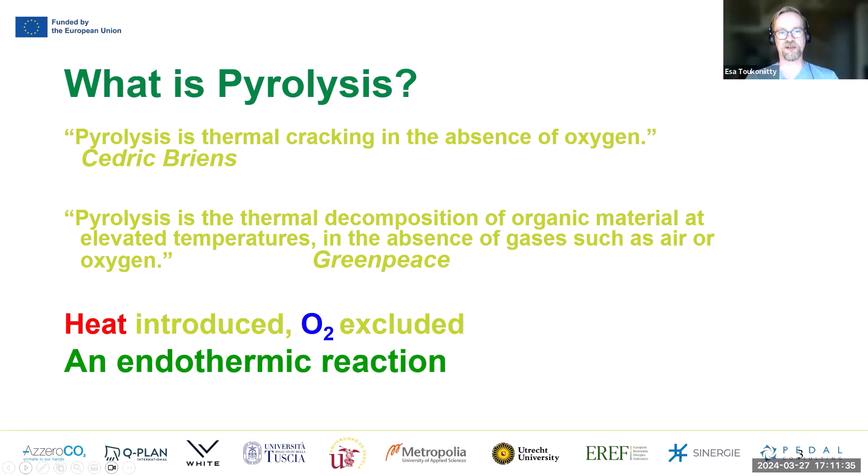We'll start with a short introduction of pyrolysis and liquefaction, and here are some definitions of pyrolysis. It's thermal cracking in the absence of oxygen. Pyrolysis is thermal decomposition of organic material at elevated temperatures in the absence of gases such as air or oxygen.

So basically the biomass is treated at elevated temperature, and it breaks down because of the temperature, and biopolymers break into smaller fractions and more chemicals.

Here is the same illustrated in terms of the biomass itself. So that will be heated to quite high temperatures. We'll take a look at some conditions and residence times and so on during today's class.

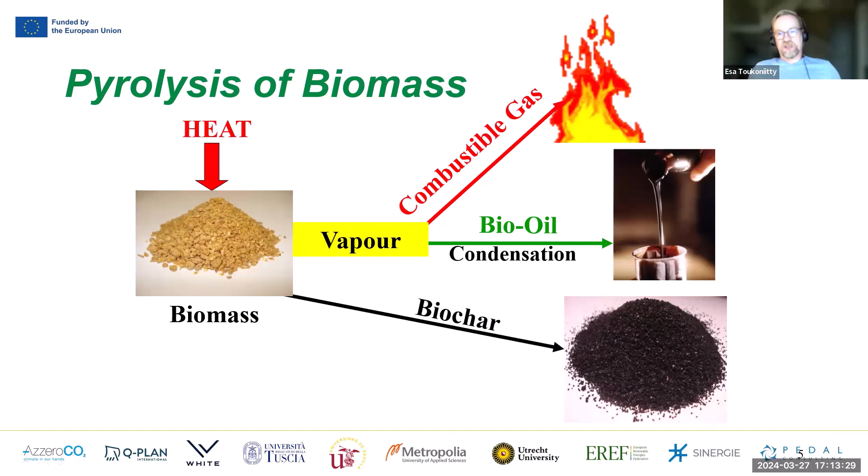But basically only biomass is fed into the reactor. It's heated rapidly and it decomposes into vapor, and also it forms biochar, which is a solid component. And the vapor at high temperature contains a so-called condensable bio-oil part and some light gases which can be combusted.

Thinking about cellulose, the one main ingredient in biomass, when heated it will break down into these different types of bio-oil components. You'll obtain also water, and here you'll see combustible gases like methane, carbon monoxide, and also solid biochar will form as products.

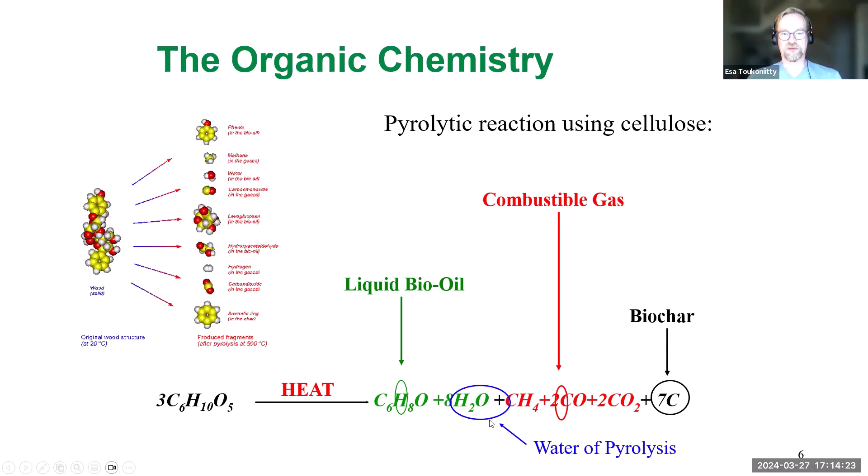Pyrolysis forms also water, and that was the last on that slide.

Advantages of biomass pyrolysis, some very general things: this is one possibility to obtain carbon neutrality, and you can utilize waste biomass, which is preferred over some otherwise useful woody biomass. It can be self-sustaining energy-wise, so the light gases and the biochar can be burnt for energy and used for the pyrolysis process heat.

These pyrolysis bio-oils have increased bulk and energy density, and in principle these can be used to manufacture or upgrade into valuable chemicals such as fuels.

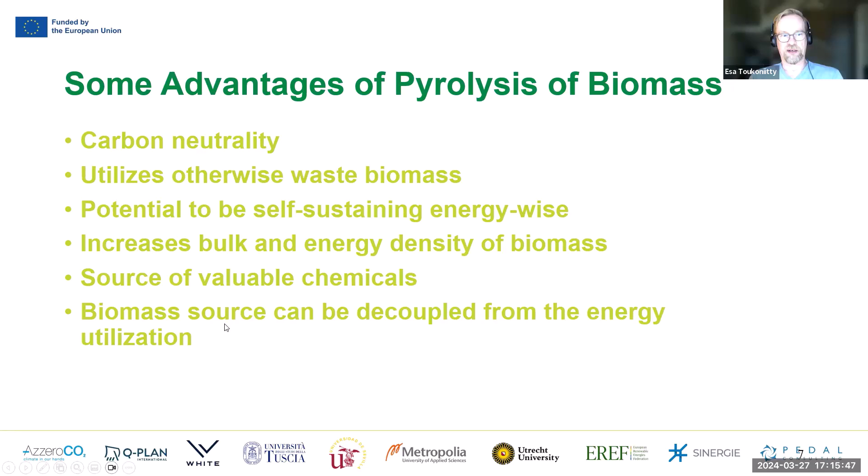Fast pyrolysis of biomass has basically three main parameters that can be varied. One is the temperature. The second is how fast the biomass will be heated, and how long these formed vapors will stay in the reactor.

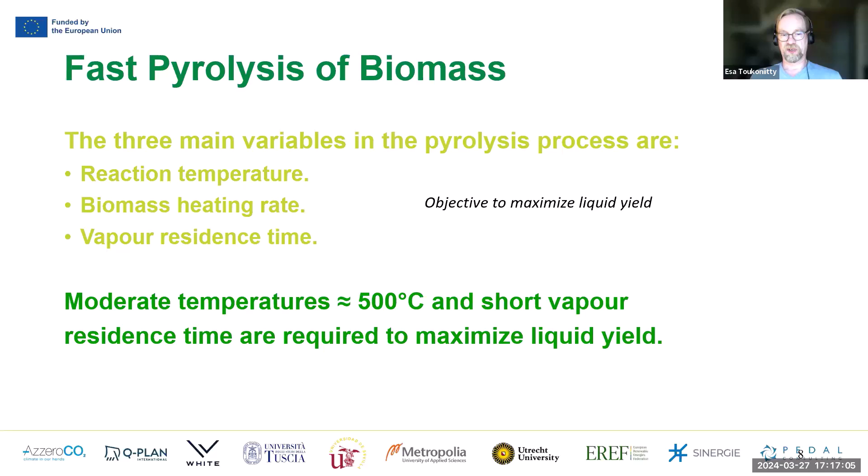With the biofuel context, the objective is to maximize the liquid product fraction. This can be done by applying moderate temperatures - in pyrolysis, moderate temperature can be somewhere around 500 degrees Celsius. Short residence times for vapor also are required, and I have a few slides about that with respect to the product yields.

Here you see different types of treatments: fast, slow, and gasification. Gasification we dealt with last week. Fast pyrolysis has a residence time much shorter in the reactor, and this is the very rough product yield - here you'll see liquid, char (biochar), and the gaseous components.

In gasification, the main product is gas, typically the synthesis gas that we discussed last time. On the other side, there is fast pyrolysis with moderate temperatures, where the main product is liquid components, and gas and solid ones are quite small.

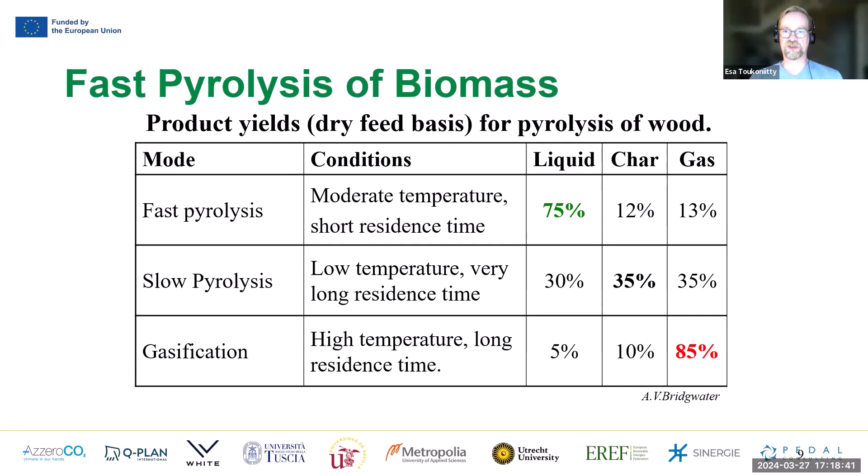Then slow pyrolysis is mainly used for production of biochar, and that's formed not as the only product, but in any case it's one of the largest products obtained in a slow pyrolysis process.

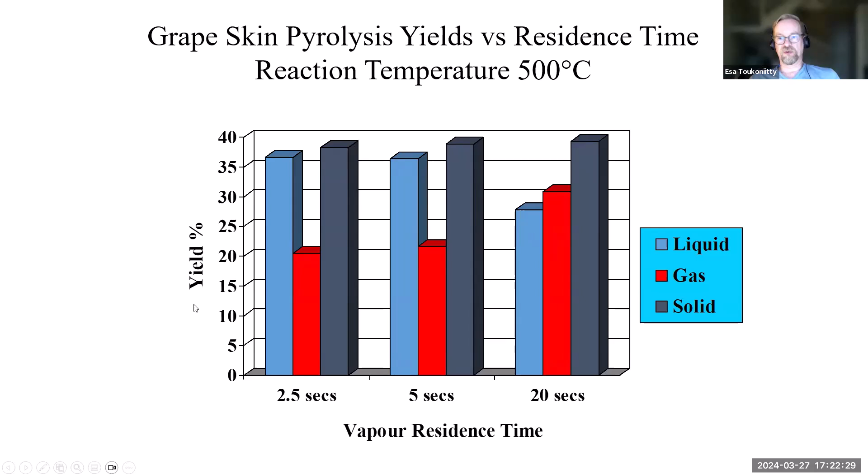At low temperature, reactions are under so-called kinetic control, and the major products are those that form from fastest reactions. But at higher temperature, the reaction is under thermodynamic control, meaning the product is the most thermodynamically stable. So if one wants to understand this another way: at higher temperature, reaction rates are so high that all reach thermodynamic equilibrium, and the product mixture is determined by thermodynamic control. But at low temperature, reaction rates are slower, and the product distribution doesn't reach the thermodynamic equilibrium composition, so it's called being under kinetic control.

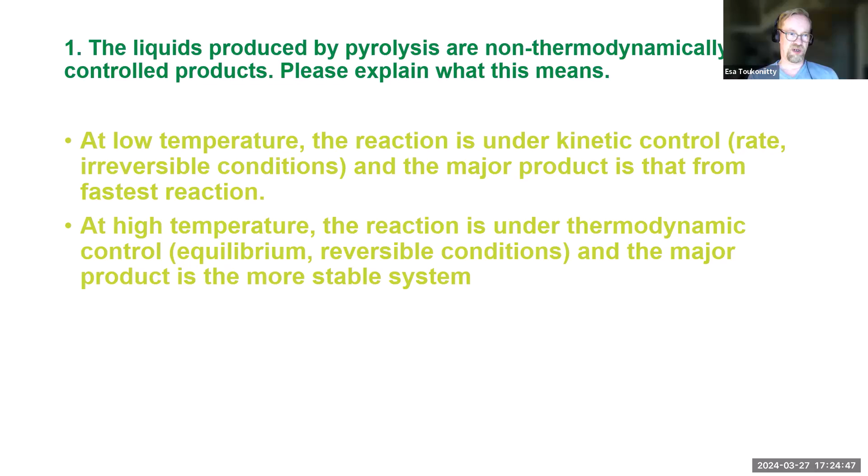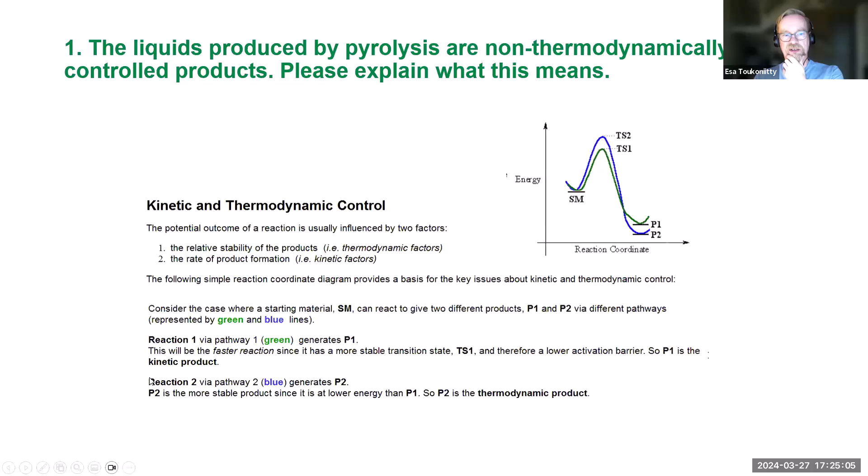Here's another explanation of what it means, but this is more on the physical chemistry side, so I will not go into details. It's the same thing described in another way. Equilibrium constants can be calculated for reactions based on theory and thermodynamic data, but often these rate constants, which are related to reaction rate, cannot be calculated, but those are based on experimental evidence.

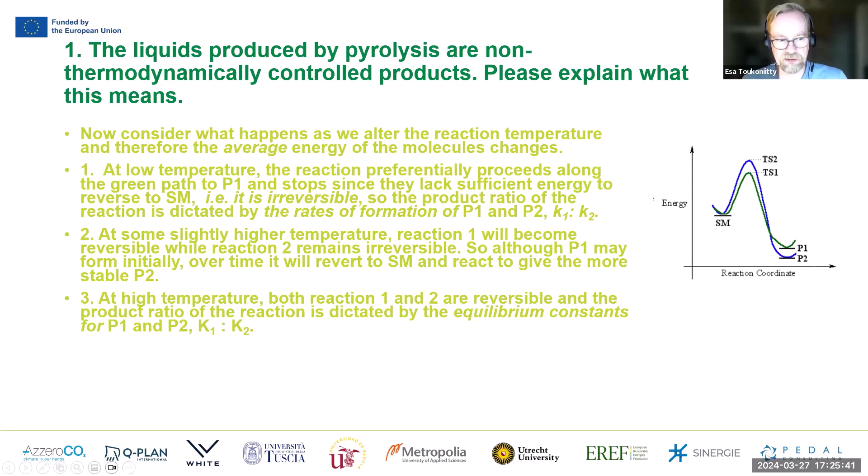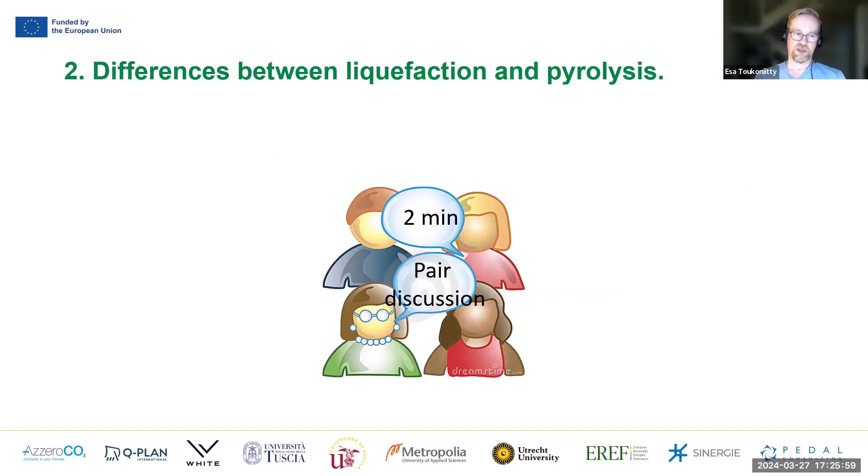Then the course book describes two main bio-oil production methods, one being liquefaction and the other being pyrolysis. So what's the difference in those?

Pyrolysis oils are water soluble and have high oxygen content, higher than liquefaction oils. On the opposite side, liquefaction is another type of process for treating biomass, and it produces water insoluble bio-oils. So there is a clear difference.

The process conditions vary in that liquefaction happens at lower temperatures and higher pressures, whereas pyrolysis is the vice versa - pressure is low and temperatures are higher. We have more material on both of these coming shortly. Pyrolysis has lower capital cost because of the lower pressure requirements - high pressure equipment is much more expensive than low pressure equipment. So that is the main factor behind this difference.

Typical characteristics and properties of pyrolysis versus liquefaction - the course book contains most of these tables and slide materials that I show here. You can compare typical properties of pyrolysis oil, liquefaction oil, and heavy fuel oil, which is a fossil-based product.

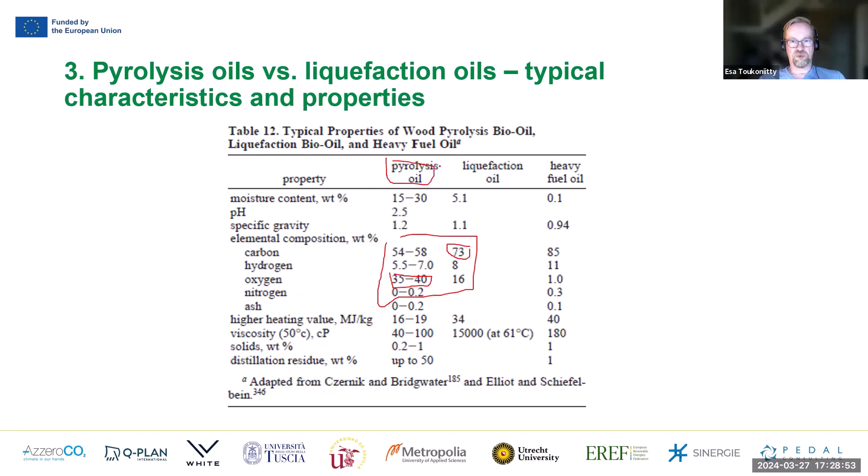The elemental compositions of pyrolysis oil and liquefaction oil vary to some extent. Liquefaction oil has clearly higher amount of carbon, which is good - that's the element we want in the fuel. On the other hand, pyrolysis oil has a lot of oxygen, which is not desired for fuel. That partly comes from different water-soluble components, making the pyrolysis oil water-soluble, whereas the liquefaction oil is insoluble to water.

Other parameters vary too - pyrolysis oil has quite a lot of moisture or water, whereas liquefaction oil has much lower amounts.

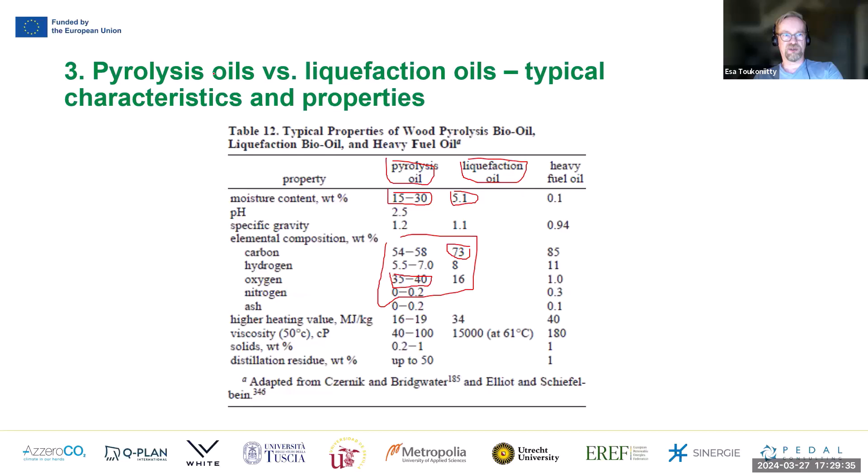Advantages that can be found for bio-oils: keep in mind that bio-oils can be made with pyrolysis or liquefaction. If you want to specify the method, you can talk about pyrolysis oil and liquefaction oil, but generally these are both bio-oils.

The benefit here is that bio-oil production requires only a single reactor, and a large fraction of the biomass energy can be converted or contained in the formed liquid product. Also, very different types of biomass feedstocks can be used, and the reactor is not that picky or sensitive regarding that.

There were some ideas for how the process would be organized. Since the bio-oil reactor setup is fairly simple, I have heard about ideas that there would be smaller reactors closer to the site where the biomass is formed, because that can be treated on site, and then the energy dense bio-oil could be transported into bio-oil refineries where fancier upgrading steps could be done. This enables cheaper transportation, since the bio-oil is already condensed.

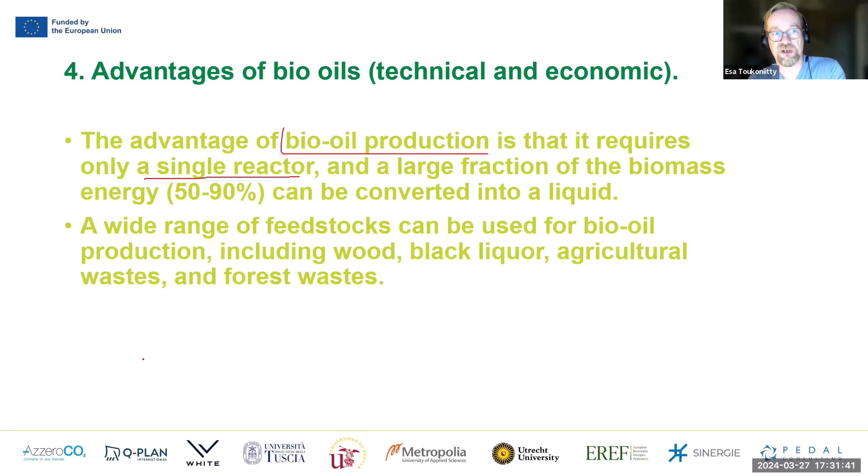Disadvantages are also in bio-oils. If we think about bio-oil as a fuel, there are lots of problematic features: poor volatility, high viscosity, coking tendency, it's corrosive, and also cold flow problems. This comes partly from the viscosity, and it's too viscous at low temperatures.

Also, although this textbook is 20 years old, I think there aren't yet really any standards for the bio-oils, and that's what we discussed in the first part of the course, that standards are very important to guarantee quality.

that the material or the fuel is of stable quality, or it fulfills the standard requirements. Main concerns with using bio-oils in diesel engines are the difficulty of ignition, corrosion, and coking, and due to these disadvantages, it's very often that bio-oils must be upgraded.

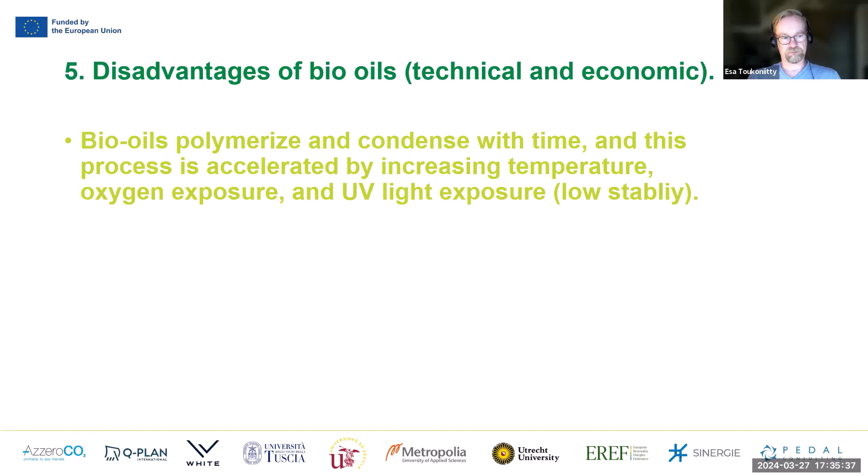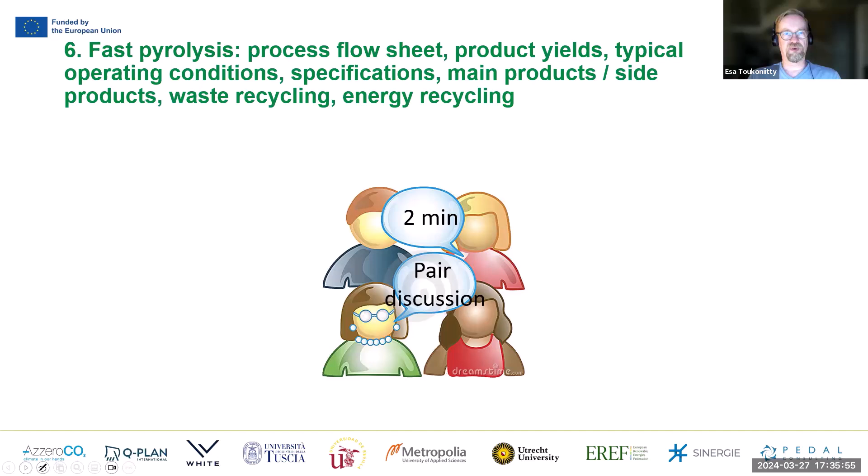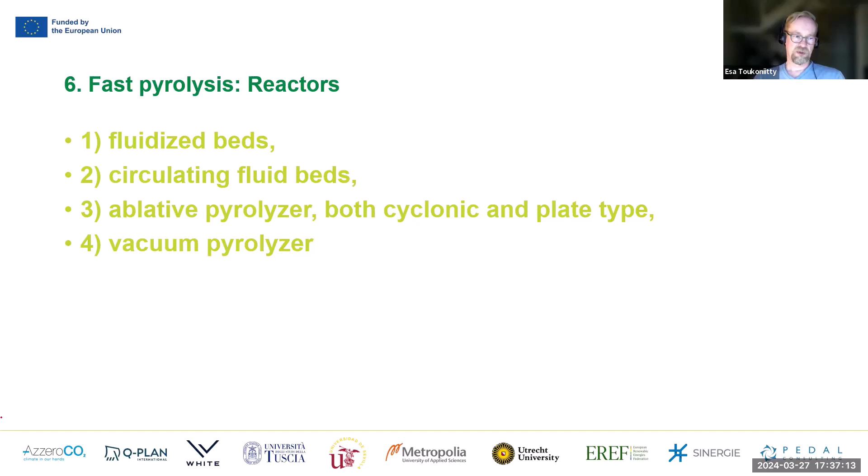There are different types of reactors for pyrolysis: fluidized bed, circulating fluidized bed, ablative pyrolyzer, and vacuum pyrolyzer. These all have been explained to some extent in the course textbook, and I have a few slides about this.

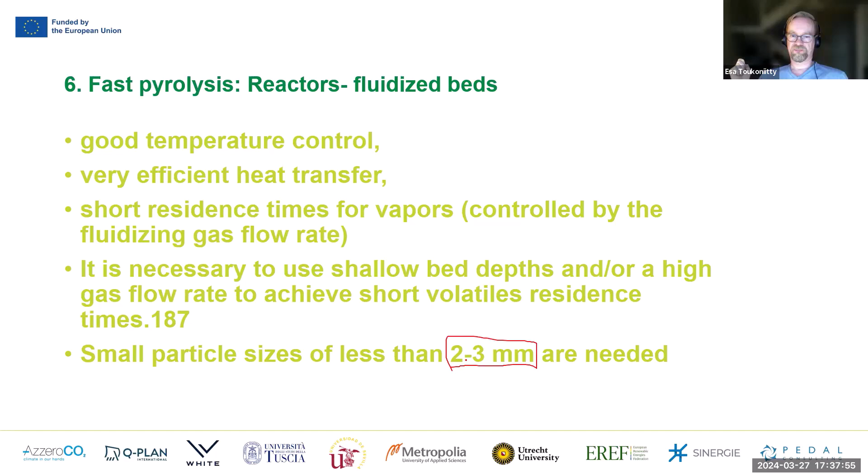Here are some advantages and disadvantages, so I will not go into these in detail because you can read those yourself. Only thing I can note is that for this type of reactor, the biomass has to be ground to fairly small powders or small particle size, from 2 to 3 millimeters diameter.

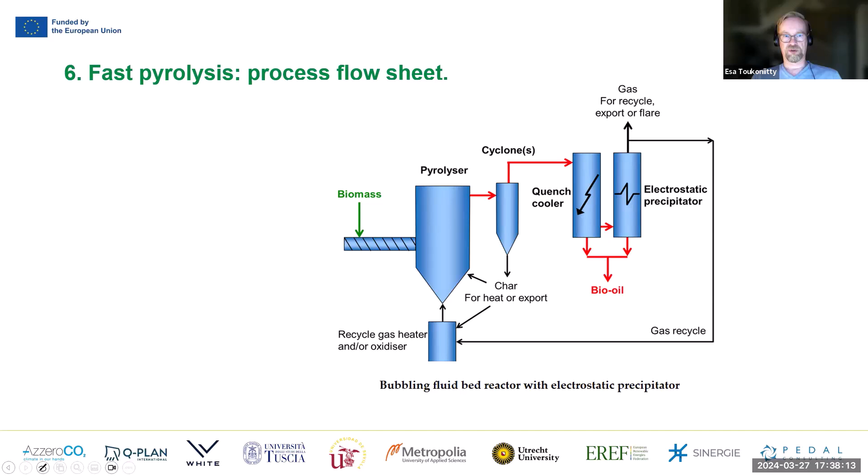I think this is more or less the same reactor setup we already saw. In fluidized beds, the heating of the biomass happens through conduction of the reactor walls and also with the help of the fluidizing gas that is pushed from the bottom all the way through the reactor.

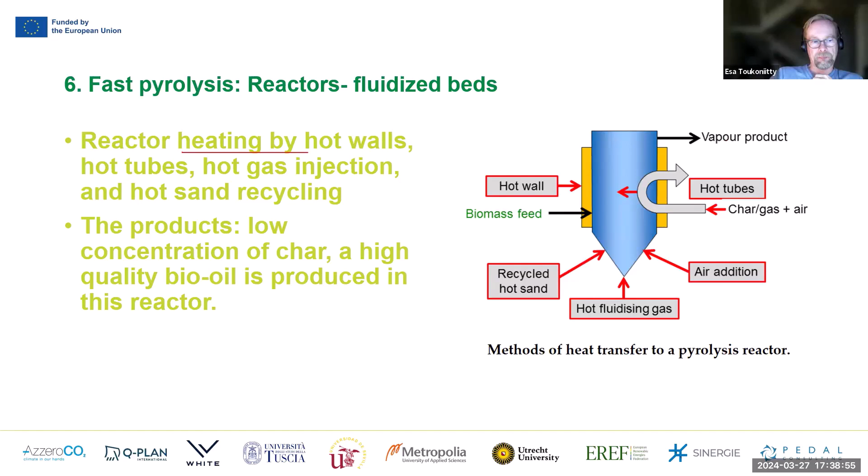Circulating fluid bed is slightly different, so the operating principle there is slightly different. The char residence time is almost the same as the vapor and gas residence time. The hydrodynamics of these circulating fluid beds are rather complex, but they can produce high throughputs of processed biomass.

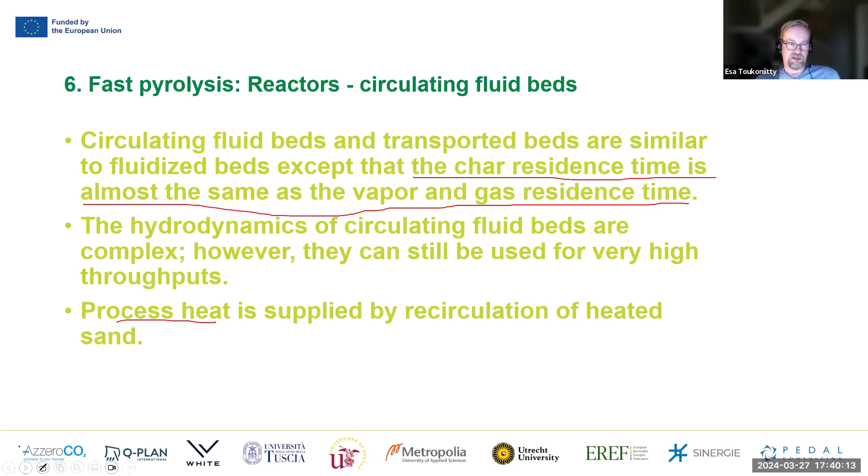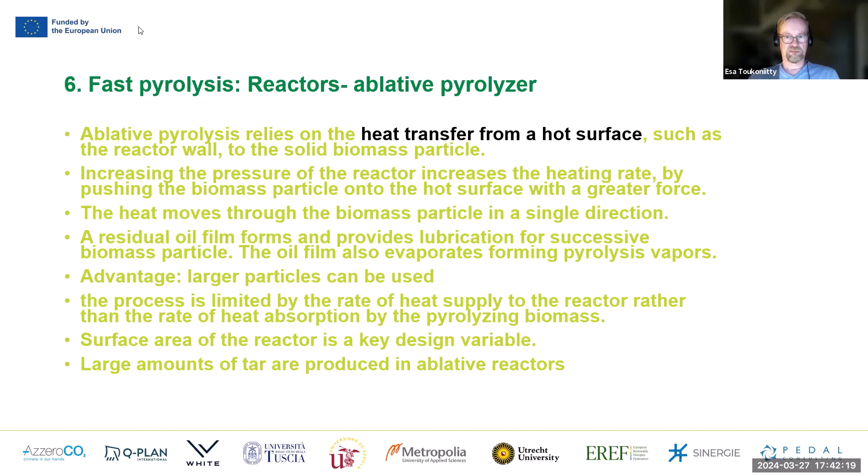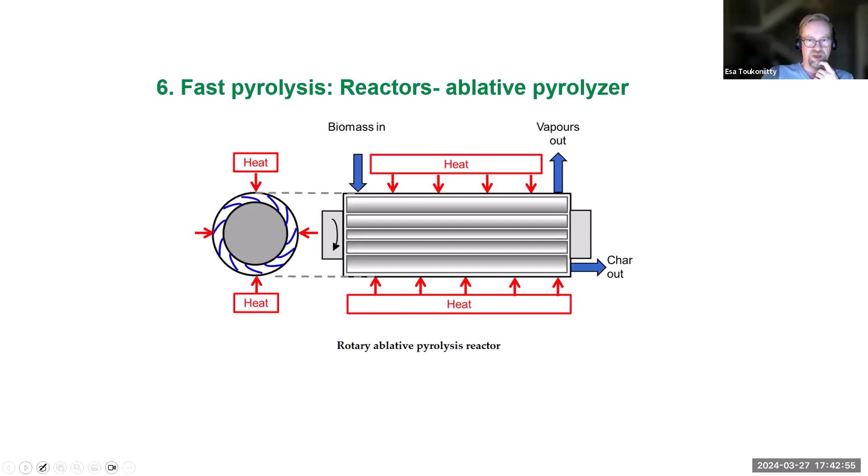This picture maybe gives a better view. These blue things that squeeze the biomass against the hot wall are called blades, and this is an enlarged image. What happens is that the blade presses the wood chips against the hot metal wall, and the heat from that wall causes the pyrolysis reactions to take place, forming the products.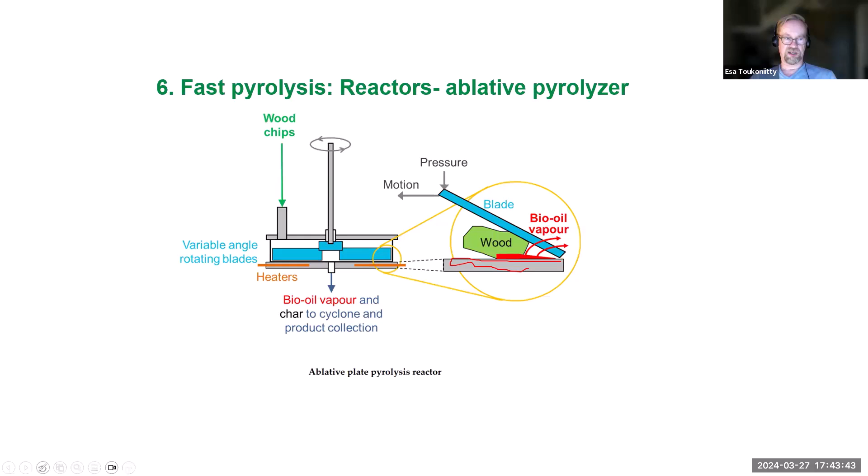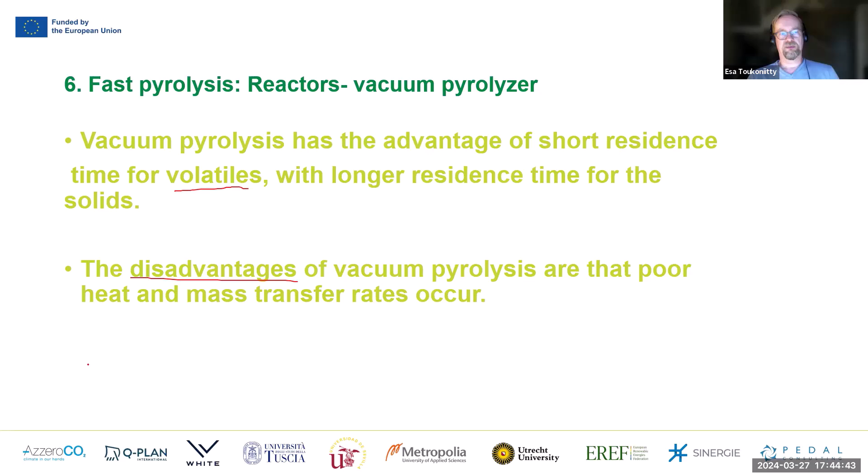Vacuum pyrolyzer was that fourth reactor type, and it has advantages like very short residence time for the volatile components and longer residence time for the solids. So it allows more balancing between the solid and the gaseous liquid components, maybe minimizing the amount of solids and maximizing gases and liquids. If there is a vacuum inside the reactor, the disadvantage is that in vacuum the heat transfer is rather poor, so that can be challenging.

Here's a collection of these different types of reactors. If you are interested, you can take a look and study these further. Here are different categories like technologies that are in commercial use and some which are only at laboratory scale.

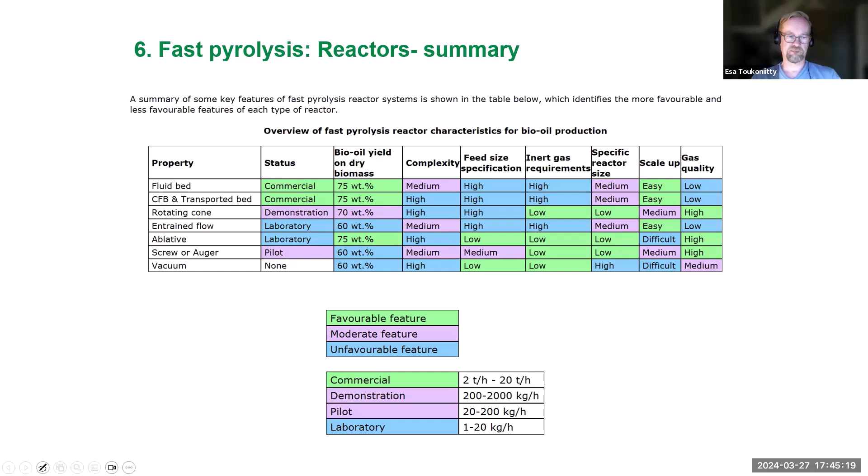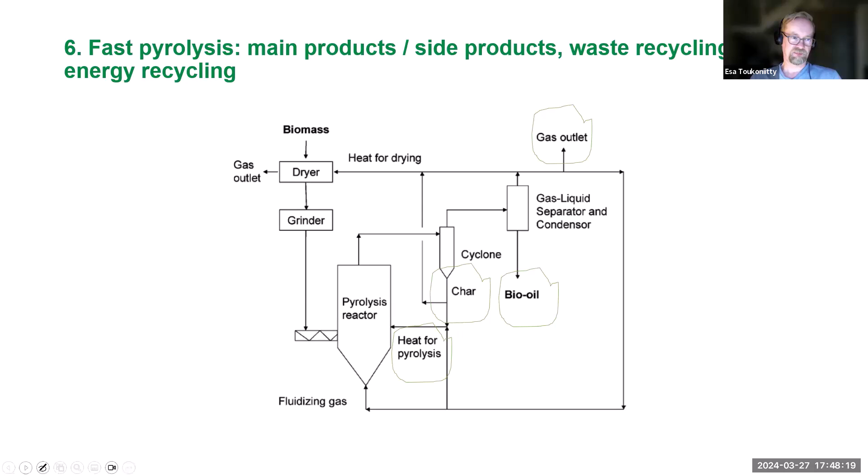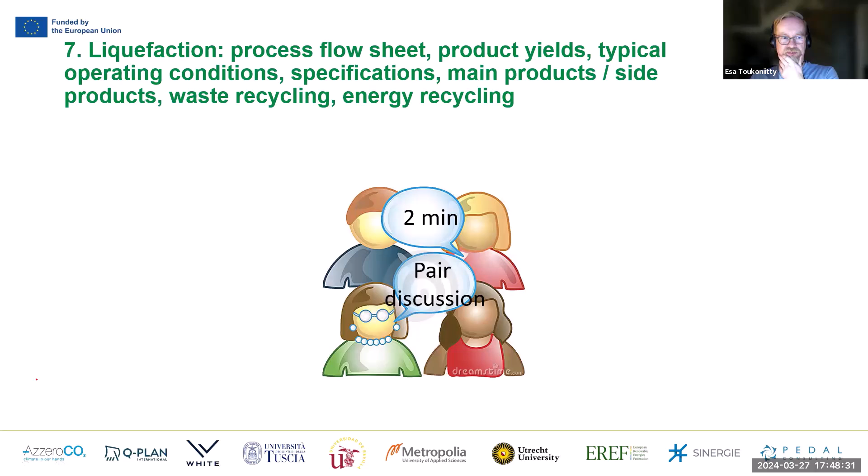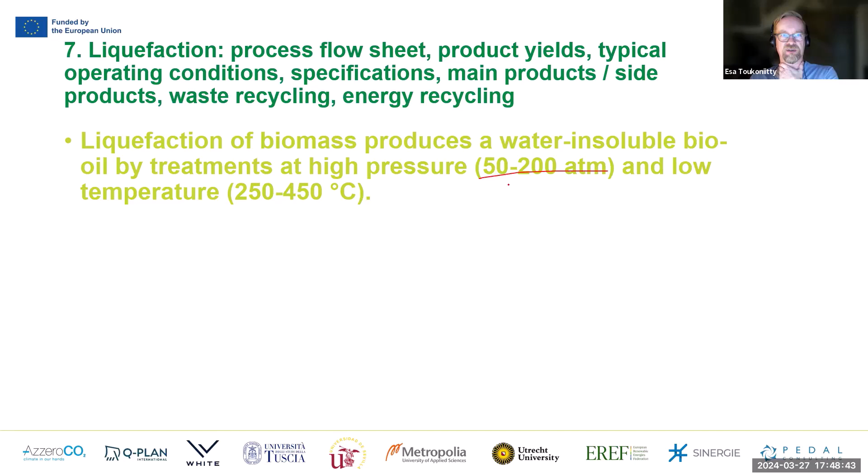But this we already went through some time ago. Liquefaction process - so previously those reactors were pyrolysis, this is about liquefaction, and here high pressure is the key to the liquefaction. So what liquefaction is: in the pyrolysis there were basically only the biomass and then the heat that is applied.

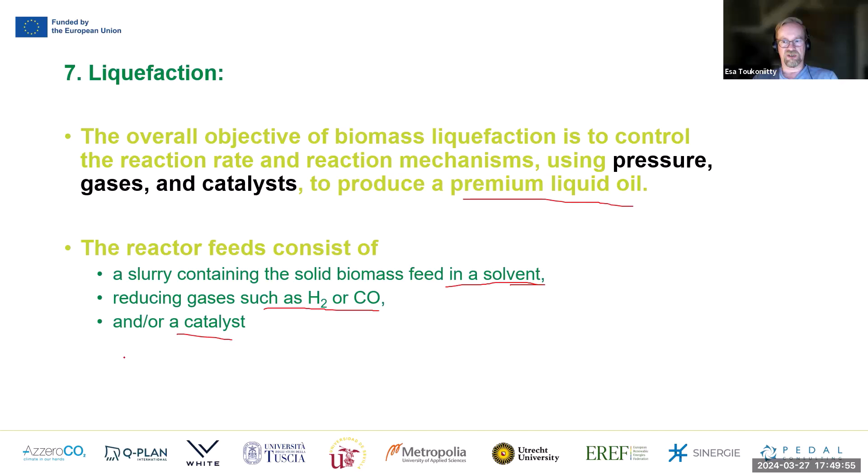In liquefaction, there is the high pressure gases and catalyst that are employed to make a higher quality liquid product, and there can also be used a solvent and reducing gases like hydrogen, carbon monoxide, and the catalyst. So this is basically a reactor where you have the biomass, then you mix it with some solvent, introduce hydrogen or reducing agents which remove, for example, oxygen impurities, typically with the help of a catalyst. So this is kind of a more demanding process.

If you utilize the solvent, aqueous solvent, so water, you can talk about hydrothermal processing. If you don't have any solvent, you can talk about hydropyrolysis. And if you have a reactive solvent, that could be some base or acid, then talk about solvolysis process.

Whenever you applied molecular hydrogen, you need a certain catalyst, because molecular hydrogen as such is very inert. Nothing happens, or it's not reactive, if we exclude combustion, so it requires the catalyst for it to do something good. And solvolysis utilizes solvents like creosote oil, ethylene glycol, or certain alcohols and phenols as solvents - some examples of those.

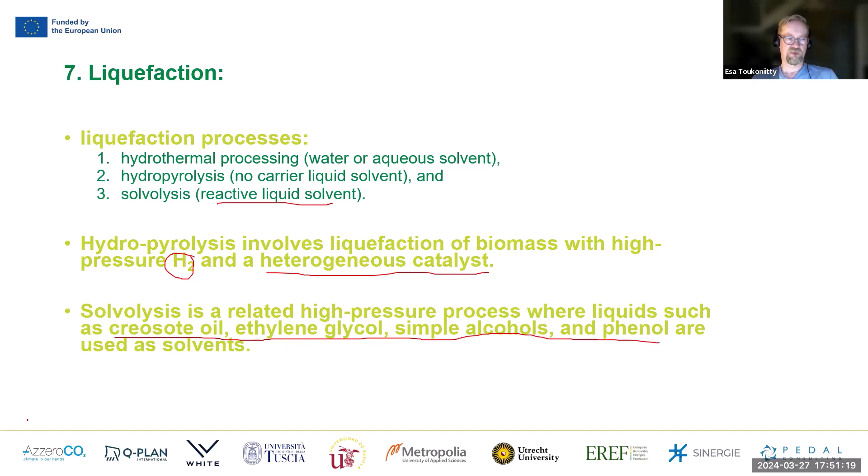So the hydrothermal upgrading or hydrothermal processing is treatment with water and the bio oil itself. That's one example where it can be applied. Here's a process flow scheme of this type of hydrothermal upgrading process.

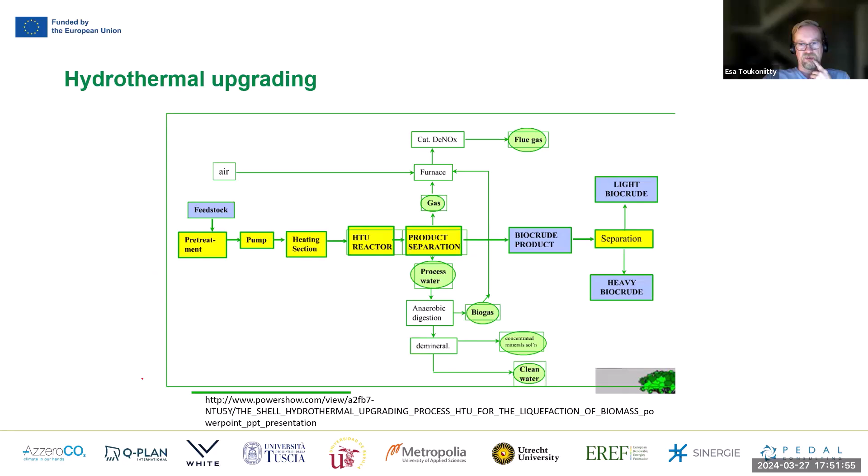The catalysts that are used in liquefaction of biomass are alkaline, typically different types of metals, or then these supported nickel and ruthenium heterogeneous catalysts, which enable hydrogenation reactions. These alkaline catalytic materials break the biomass into different chemicals, the same with this another type of metallic catalysts.

And regarding the solvents, of course water is the most attractive due to its low cost. Another thing is that biomass has always some amount of moisture, so if you use water as solvent, you don't need to dry the biomass before the liquefaction process. So that makes sense to use water.

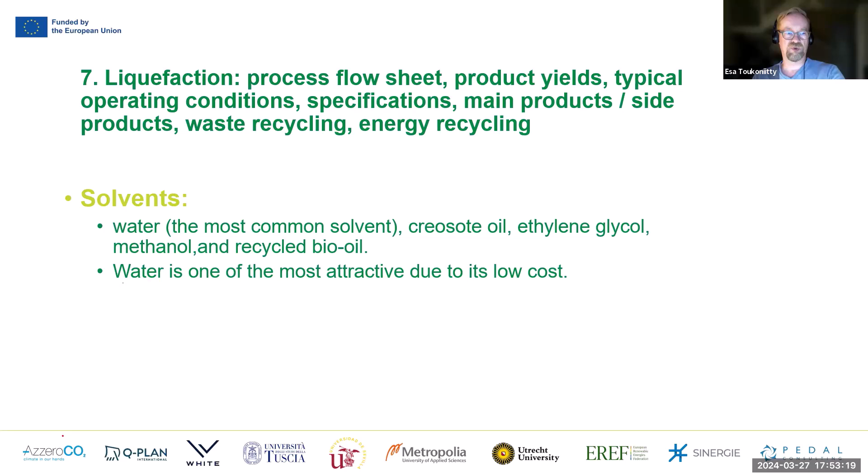A few words about the different reactions that take place while processing or producing these bio oils. There are a lot of reactions taking place because there are hundreds of different molecules or products which can react, which can break into different molecules, and the formed molecules can react with each other.

This is just a list of some examples: hydrolysis, dehydration, isomerization, dehydrogenation, aromatization, retrocondensation, and coking.

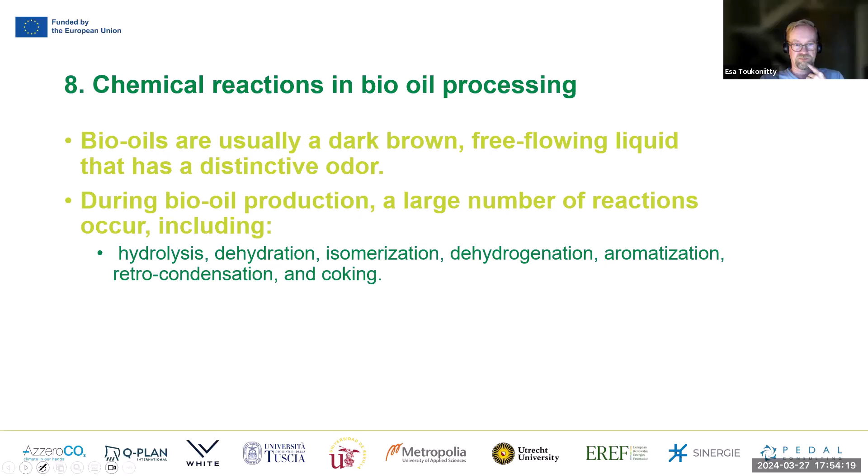What these reactions form is a very broad range of different products: acids, esters, alcohols, ketones, aldehydes, oxygenates, sugars, furans, phenols, and so on. A really complicated mixture of these organic molecules—there can be tens of different acids or esters and so on. So quite a complicated mixture.

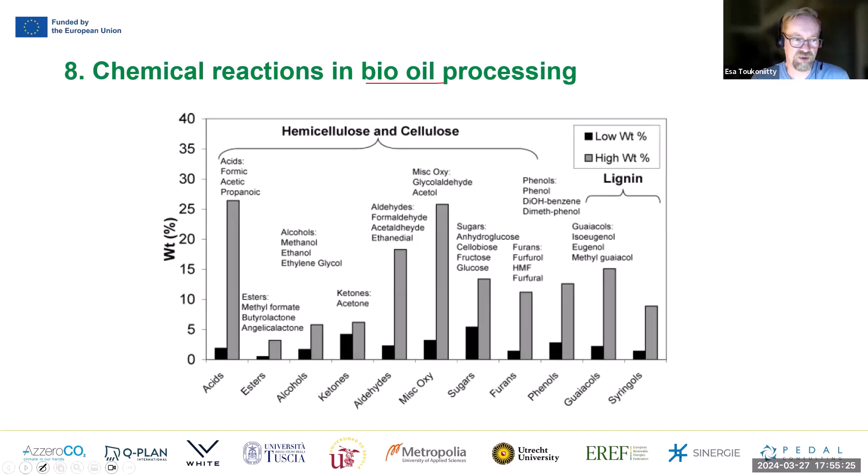But on the other hand, if you compare bio oil to fossil-based crude oil, it also contains hundreds of different organic molecules. So in that sense, bio oil is not exceptionally complicated, but it's closer to the crude oil composition.

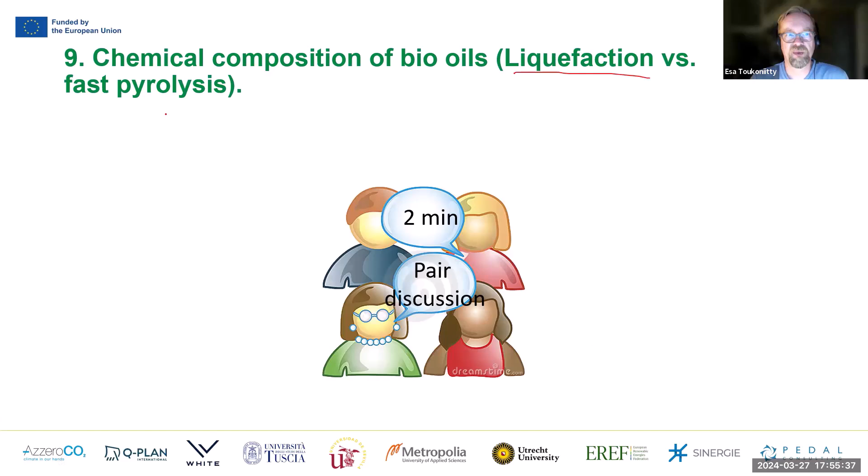We glanced through this already, but keep in mind that pyrolysis oil is this water-containing, water-soluble composition. For organic materials to be water-soluble, they usually have to have oxygen functionalities, like alcohol or carboxylic acid. That comes from what I already showed you—the elemental composition is very high in oxygen, and that boosts the water solubility.

Also, liquefaction oil has much higher heating value compared to pyrolysis oil, and it's nearly comparable to fossil-based heavy fuel oil.

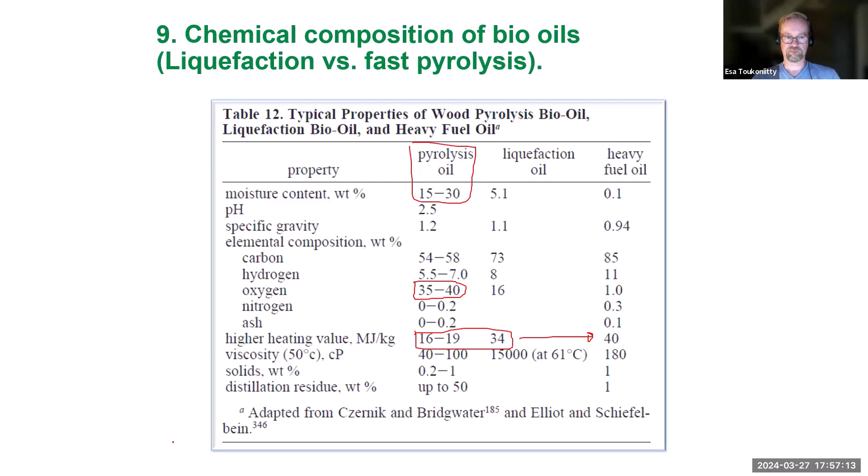So in summary, liquefaction and pyrolysis are the two major techniques to produce these bio oils, and as we just saw, liquefaction and pyrolysis oils have a different composition.

One key observation is that the majority of these bio oils are of low or poor quality for fuel applications, and they require some processing or upgrading in order to be used in, let's say, diesel or gasoline engines.

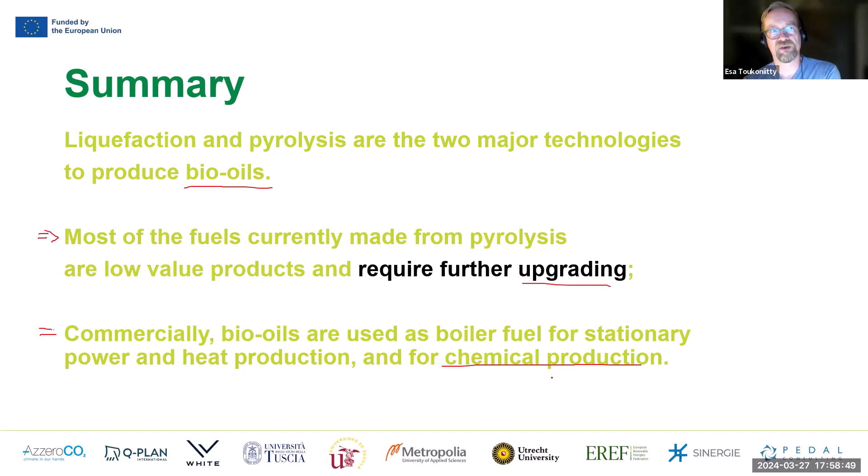Typically these bio oils are used as boiler fuel or in power and heat production, and in some cases also for making chemicals, but that could fall into this upgrading category. If you process the bio oil further, you can make valuable chemicals or fuel components.

Bio-oil upgrading material can be found in the course textbook, chapter 6, which covers these topics. Some of the techniques we go through have a lot of new information and research since the textbook was written, but the main principles and ideas come clear, and that's the purpose of this course as well.

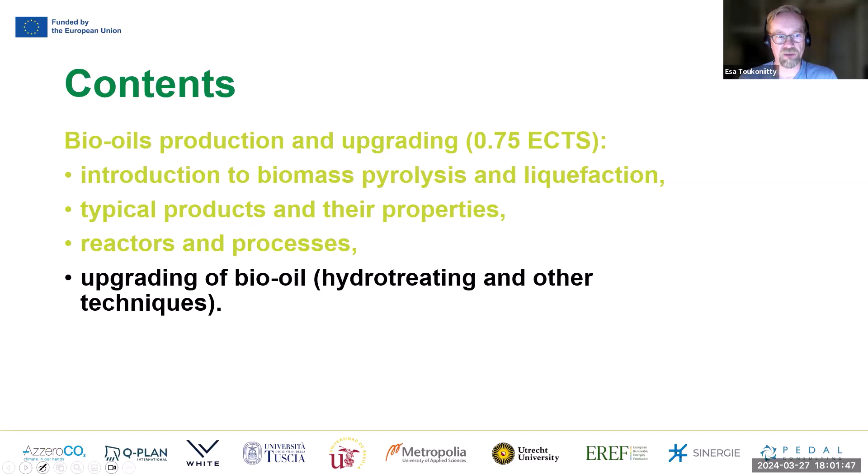If we take a look at the valorization pathways of lignocellulosic biomass, we've been dealing with pyrolysis and liquefaction. If you look at this process scheme further, these primary products we discussed, like pyrolysis oil and liquefaction oil, are both upgraded here with hydrotreating and refining in order to get useful products—the same with liquefaction, treatment with hydrogen and refining it further.

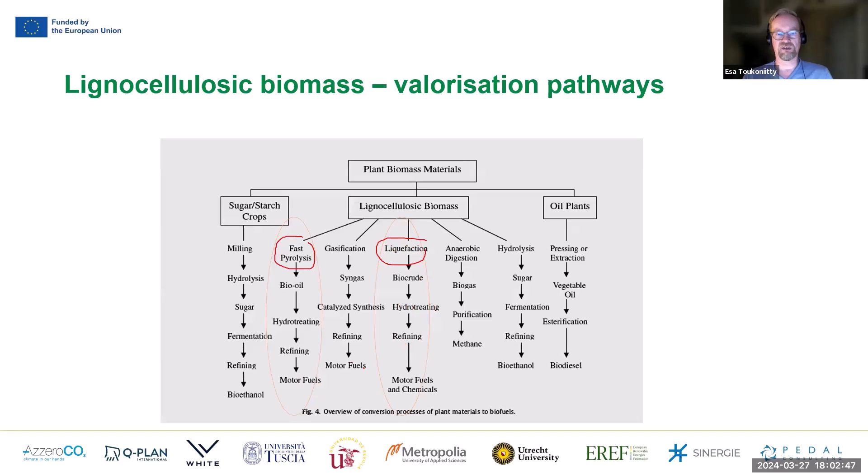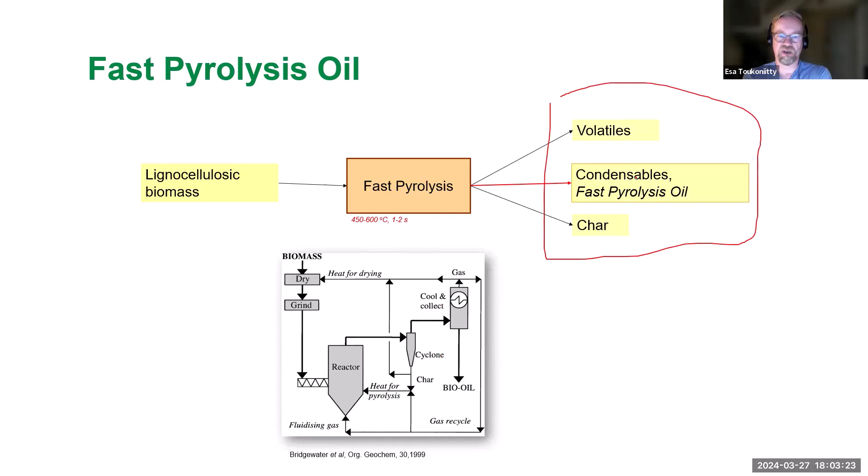So then we get closer to value-added products, useful chemicals and so on. These products obtained from pyrolysis are not that useful as such, but the volatiles can be used to produce heat for the process, and the same with the char. This pyrolysis oil, or the condensable part, will be processed or upgraded further.

The motivation for the upgrading is that pyrolysis oils are quite poor quality chemicals in terms of fuels. There's high oxygen content that is not desired for fuels, because you want a fuel that has low oxygen content so that it can combine with oxygen molecules and combust or burn, producing energy. If it already has oxygen, it has lost some of the energy production potential.

These are immiscible with petroleum products, meaning they will not mix with petrol, gasoline or diesel. They're water soluble, meaning they don't dissolve into typical organic fuel components, as we already mentioned earlier. These bio-oils are also unstable—the stability is low because they undergo side reactions like coke formation, and they can form larger polymeric structures, which are not desired in a fuel component.

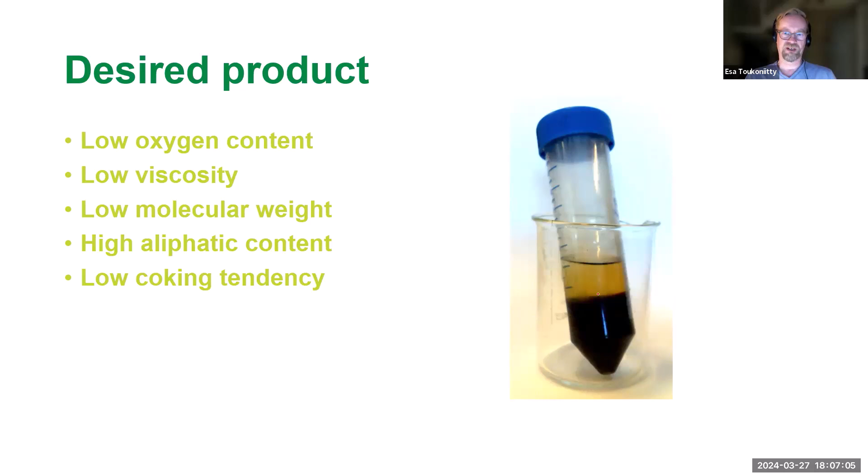So here is a small plastic container that shows how the bio-oil looks like. It's not very clean looking material.

This covers the same disadvantages we already went through. Is there something I should maybe highlight still? Maybe not.

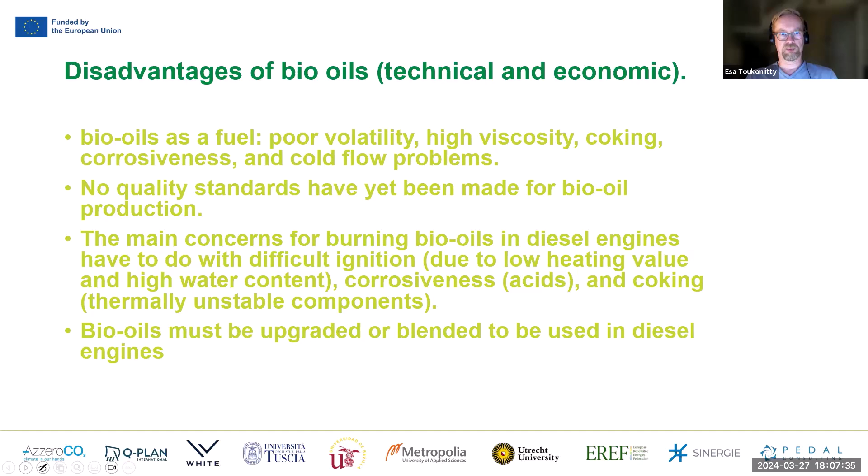This is something you don't want: with bio-oils, there are so many different types of organic molecules that are quite reactive - acids, aldehydes, ketones, and alcohols. These can easily react with each other and form secondary products or polymers just by being in contact. If you increase temperature, side reactions and other reactions tend to become faster. Oxygen exposure also promotes oxidizing reactions, and exposure to ultraviolet or direct sunlight can catalyze or enhance these reactions as well.

So the disadvantages are: low heating value, since there's a lot of water and not many high heating value components inside. It's incompatible with conventional fuels, so it cannot be used as a drop-in fuel because it's chemically very different. It's also problematic when it contains solid material, if it has too high viscosity, if volatility is too low to ignite well, and this chemical instability is problematic.

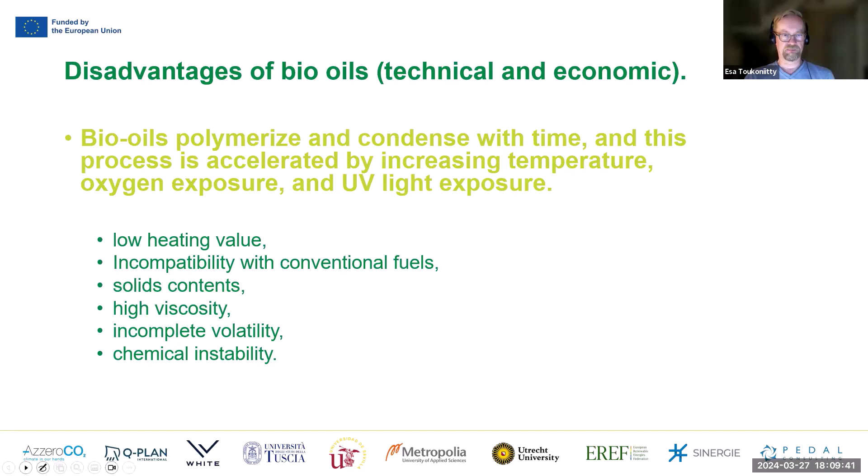The course textbook focuses on four different upgrading techniques. One is hydrotreatment. Second is upgrading using zeolites, which are kind of acid molecular sieves, often acidic materials. Third is making blends or forming emulsions where you mix the bio-oil and conventional diesel fuel. The fourth is something we already studied in the gasification part last week - processing the bio-oils by steam reforming to produce synthesis gas, and then all the routes that come with synthesis gas are also possibilities.

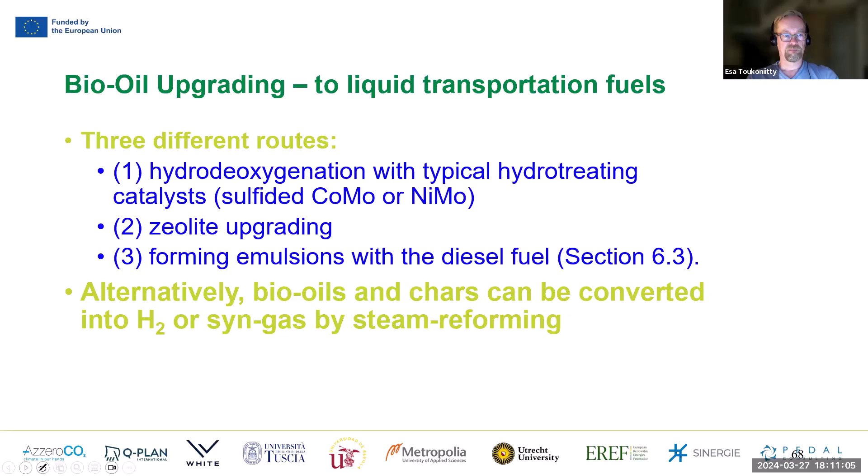So, hydrodeoxygenation, or HDO. It's basically hydrogenation reactions - you have high pressure hydrogen in the reactor with hydrogenation-suitable catalysts and high temperature. What happens is the oxygen atoms are converted with hydrogen and catalyst into water, so the oxygen functionalities are removed from the hydrocarbon structures. Also, if there are unsaturated carbon double or triple bonds, those are saturated to single bonds. So the hydrotreatment makes the bio-oil and various chemicals closer to fossil fuel hydrocarbons - that's the idea.

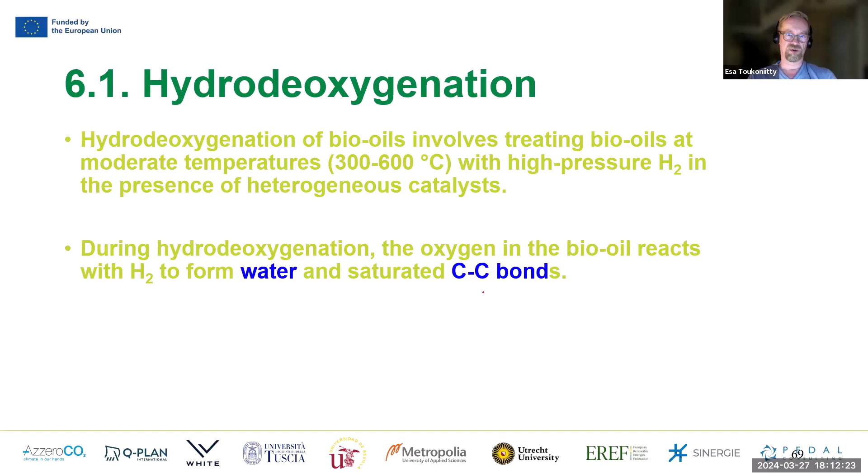So this is what happens - the same thing already explained. The pyrolysis oil enters the deoxygenation reactor or process, and you need to feed hydrogen into the system. Basically the biomass bio-oil components react with hydrogen. You get the desired hydrocarbons, and as a side product you get water, carbon dioxide, methane, and carbon monoxide. So this upgraded oil is the better quality fuel component, whereas the water and gaseous components are removed after this hydrodeoxygenation treatment.

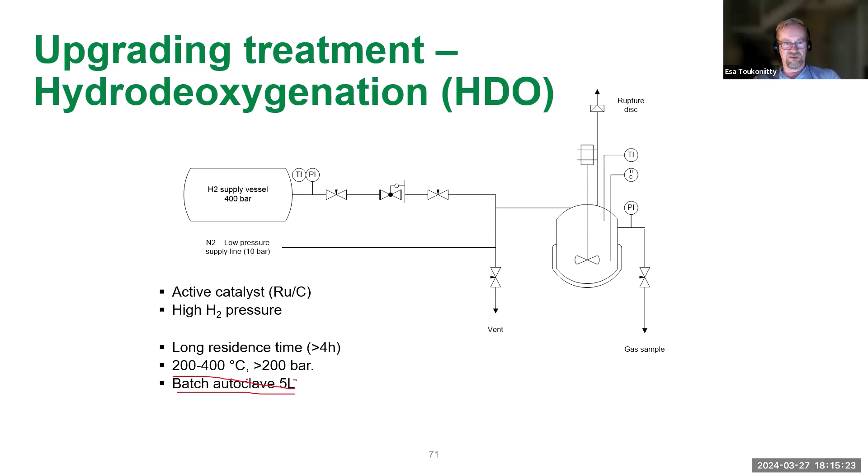Products that are obtained: after hydrodeoxygenation, one can get the oily phase, which is the fuel component, then the gas phase, which contains light hydrocarbons that can be burnt, and the aqueous phase, which also contains some water.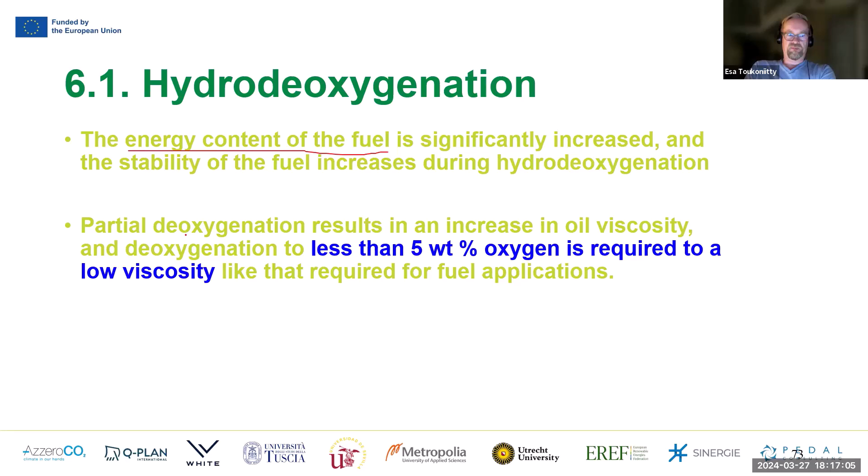The good thing about this hydrodeoxygenation process is that the energy content of the obtained fuel is significantly higher, and also the stability of the fuel is much better, because several reactive organic molecules are removed or converted into regular hydrocarbons, which are much more stable than the alcohols, aldehydes, ketones, and carboxylic acids removed by this treatment. Also, an increase in viscosity takes place during this process.

For this hydrodeoxygenation, commercial sulfide cobalt-molybdena or nickel-molybdena based catalysts are used. It's not surprising that these are the same type of sulfide catalysts used for hydrodesulfurization, removal of nitrogen, and removal of oxygen in the petrochemical industry. So the catalytic materials and process conditions are close to each other.

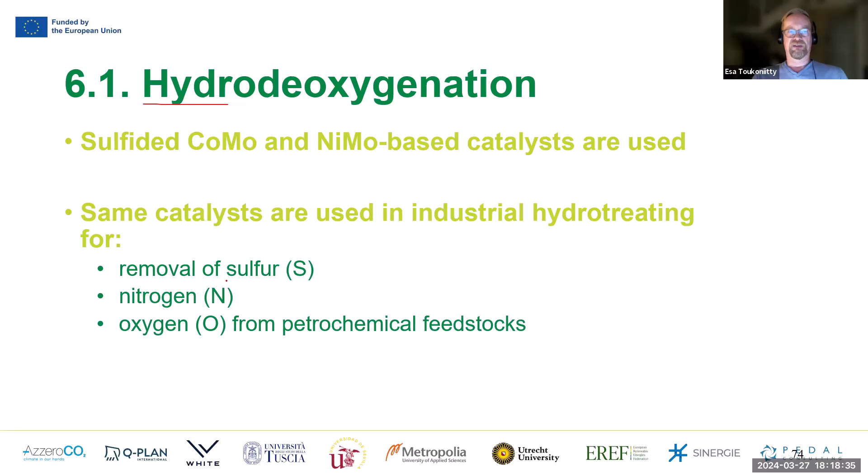So hydrogen is utilized to remove oxygen, nitrogen, and also sulfur. These removals with hydrogen improve the fuel quality when removing oxygen or nitrogen, and also improve the exhaust gas quality, since once sulfur is removed it will not cause sulfur dioxides, which is good for the environment.

Here is the difference between the bio-oil being processed and how it changes after the hydrodeoxygenation process. So carbon content increases, oxygen content decreases, and the same is true for water content. The higher heating value nearly doubles after this treatment.

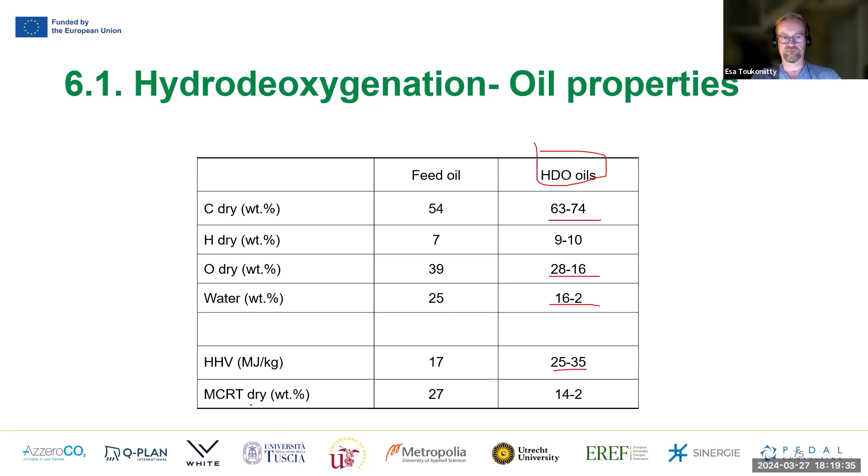Then a few words about zeolite upgrading. We went through zeolite materials in connection to catalytic materials. Some zeolites can be found in nature - these are clay-type minerals that have a porous microporous structure, tiny channels, and well-defined crystalline materials. Typically, the zeolites used in this type of application are acidic zeolites. These have a very strong acid character, but are solid materials, so they can promote acid-catalyzed reactions.

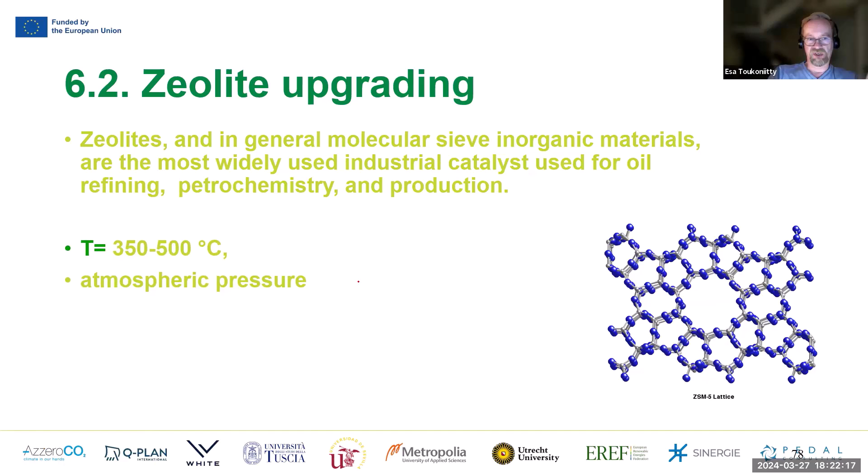Dehydration, cracking, polymerization, deoxygenation, and aromatization reactions happen during this zeolite upgrading process.

The advantages of this method are that applying zeolites at high temperature and low pressure improves quality without the need of hydrogen, and the low pressure reduces operating cost. Temperatures are similar to those normally used for bio-oil production, so in principle this could offer economic advantages over hydrotreating upgrading.

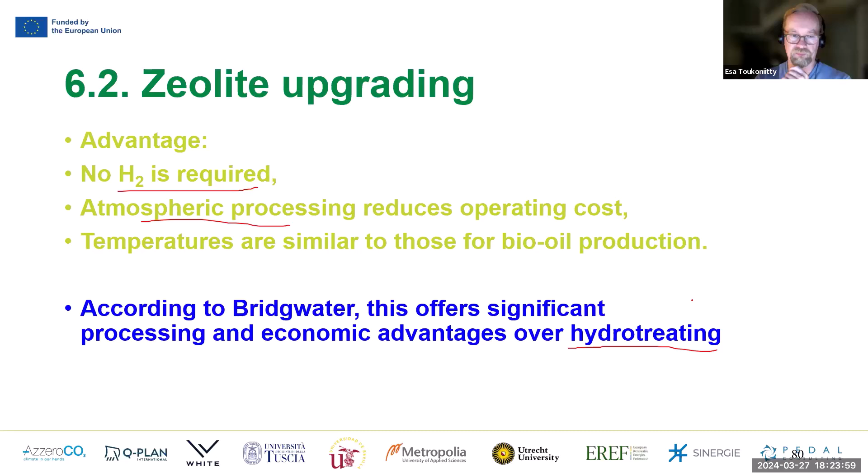There are disadvantages too, and the hydrocarbon yields obtained from zeolite upgrading are quite low. Also, linked to the property of a zeolite, coke formation is quite high. Very often when dealing with zeolites as catalyst, the acid functionality tends to promote coke formation, and that causes problems.

Related to coke formation, quite a lot of the bio-oil will be deposited on the catalyst as coke or in the reactor as char. This is something that should be taken care of, since coke deposit on the catalyst will also lower the catalyst activity and deactivate the catalyst.

For example, in oil refinery crackers where they use catalyst for catalytic cracking, the catalyst lifetime is just a few seconds because of coke formation. So there is a catalytic reaction stage and a continuous catalyst regeneration stage where the coke is burnt out from the zeolite, then it enters again into the reactor for a few seconds, and then it exits and enters the regeneration stage again. This is typical for these acidic zeolites.

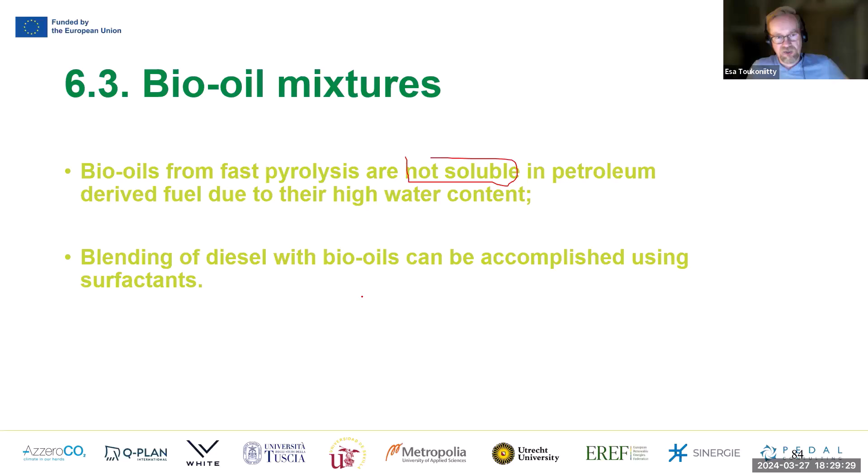One needs to apply additional chemicals to make mixtures, like emulsions - mixing oil and aqueous phase with each other, and that costs money, but it can be used in some cases. Bio-oil emulsions have improved characteristics, but the drawback is that the surfactants are expensive molecules. On the other hand, there are commercial surfactants available that work. In any case, this is a kind of brother to blending - forming mixtures and then increasing the biocomponents in the fuel.

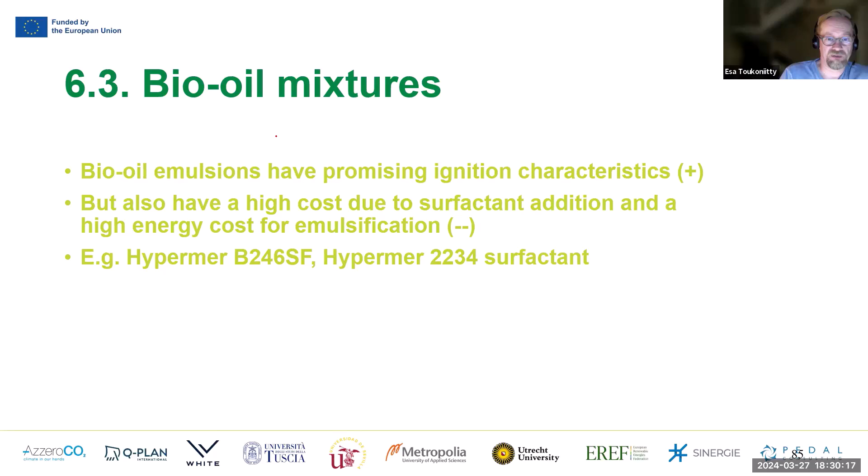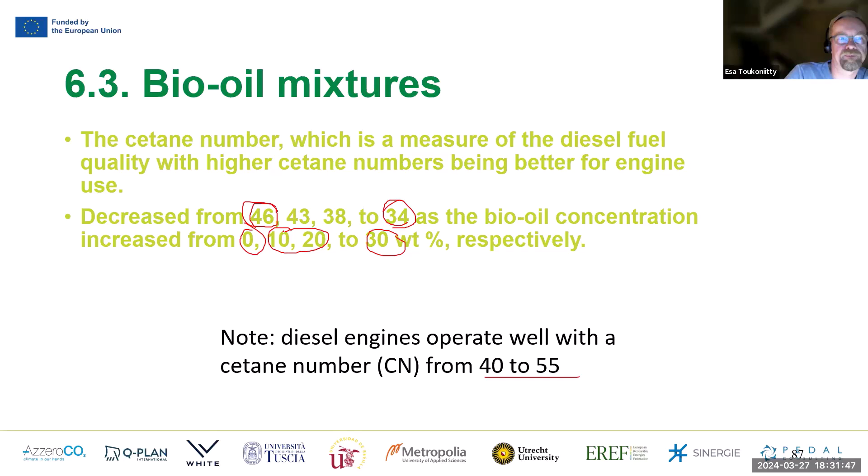The last upgrading method treated in this context would be the steam reforming of bio-oils, and this is a potential application I already tried to describe in the introduction - that bio-oil production technology could be applied so there are smaller pyrolysis plants which are technically simple for forming bio-oils, and these bio-oils would be economically feasible to transport longer distances to a large centralized biorefinery or regular oil refinery, where they could be upgraded and used for making bio-based chemicals and fuels. One route for that could be synthesis gas derived fuels.

So the bio-oils would be converted to synthesis gas, and then possibilities would be hydrogen, methanol, or even these Fischer-Tropsch hydrocarbons that we discussed last week.

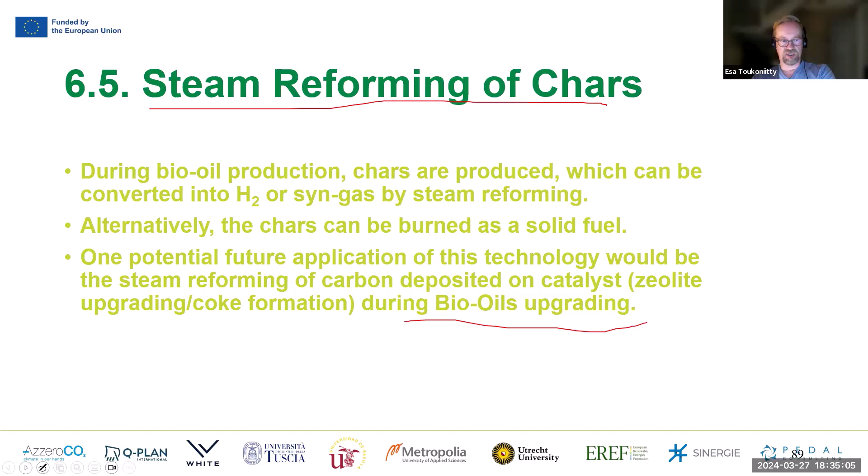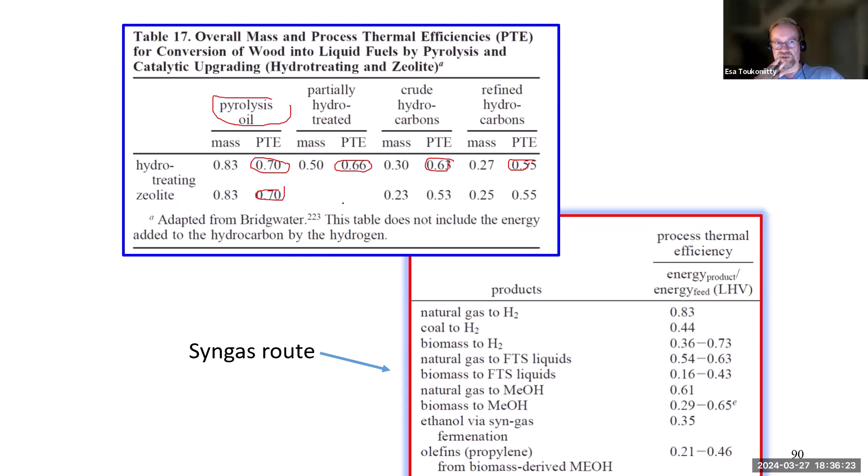Here are some process thermal efficiencies for different upgrading routes. If we take a look at the starting material - when you go to better and better products, from pyrolysis oil to partially hydrotreated to crude hydrocarbons and refined hydrocarbons, you tend to decrease the process thermal efficiencies as you make it more and more upgraded, more and more refined. But in any case, here you have information about how much of the actual energy is stored after processing these into more suitable fuels. That's of course of key importance - if the process thermal efficiencies drop to very low values, it becomes economically unfeasible for the processes to work.

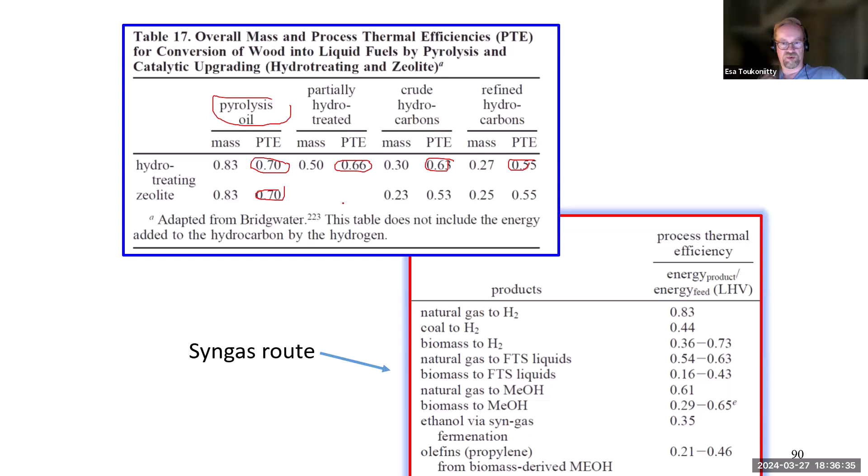So, short summary about bio-oil upgrading. Hydrotreating - treatment with hydrogen - is commonly done in oil refineries to remove oxygen, sulfur, nitrogen functionalities, and the same or very similar technique and catalyst can be used to upgrade bio-oils into better hydrocarbon fuels. Zeolite upgrading we discussed shortly - the good side is that it doesn't require the molecular hydrogen used in hydrotreatment; you only need bio-oils and zeolites, and high temperature and low pressure is sufficient to improve the hydrocarbon content and composition. Bio-oils can also be converted to emulsions with diesel fuel, and this enables increasing the bio-oil content in diesel without sacrificing the cetane number and performance of that fuel very much.